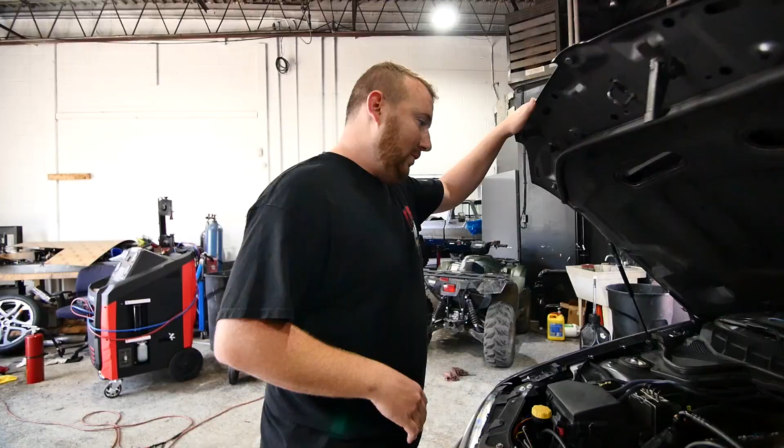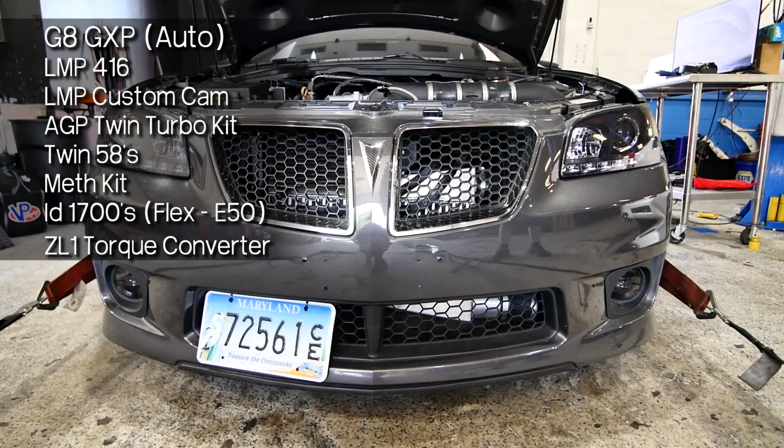What kit is this, AGP or something? I think so, yeah, AGP kit. We did not do this build, by the way. It came in not running, smoking like a freight train, so we did a leak down on it. Number 7 or 8 cylinder, I forget. The piston was torched. We put new pistons in it and put our cam in it, plus a couple odds and ends, you know, it's got meth on it. We buttoned up a couple things with the turbo kit that wasn't very clean before. It's still got a stock trans in it. I think this motor was like 10 years old before, had a lot of miles on it. I didn't tune it before though, someone else down south did it.

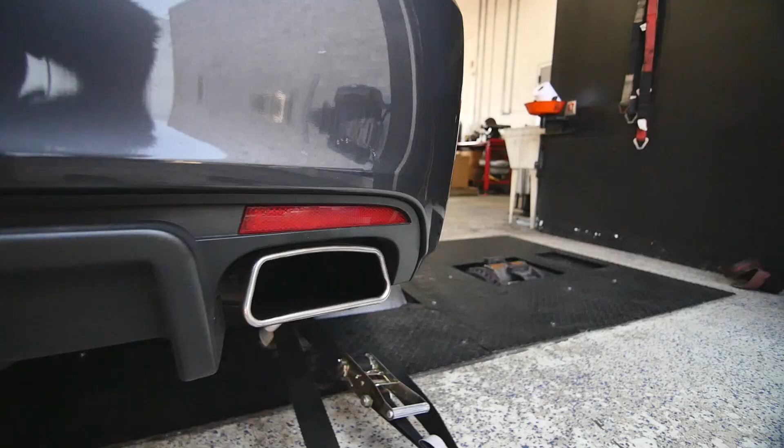So I heard a pretty bold claim about this, apparently it's the fastest GXP in the world. I think so, I don't know exactly. I mean, I know of a few fast G8s, but... That's a GXP? If it is, I feel very privileged. Yeah, you should. Sweat, you don't even need those things, no? Yeah, it's such a habit.

I'm like, what do you do?

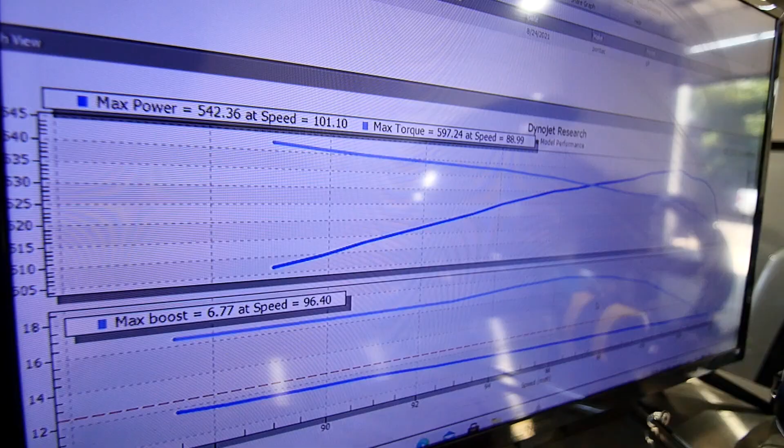So pump gas, not a full pull, 6.7 pounds, 13.5 degrees. Okay, so like nothing. Yeah.

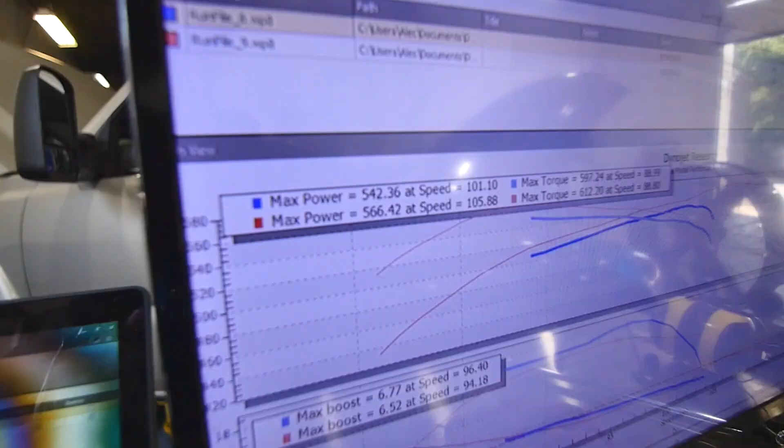What's his goal with this thing? I don't know, make it live I guess, because that's what came in blowing off. It's been 960 before, so probably a little faster than that. We didn't really change much, just fixed it and changed the cam. I mean, 960s with this is pretty fast considering he's got 100% stock drivetrain, stock trans, stock everything, it's a 6L80. So yeah, that's impressive in itself. I told him he's going to need to put a transmission in sooner than later.

Are we doing E on this thing at all, or just doing meth? Probably E50. Okay, yeah, cool. Yeah, it has a flex option. All right, cool.

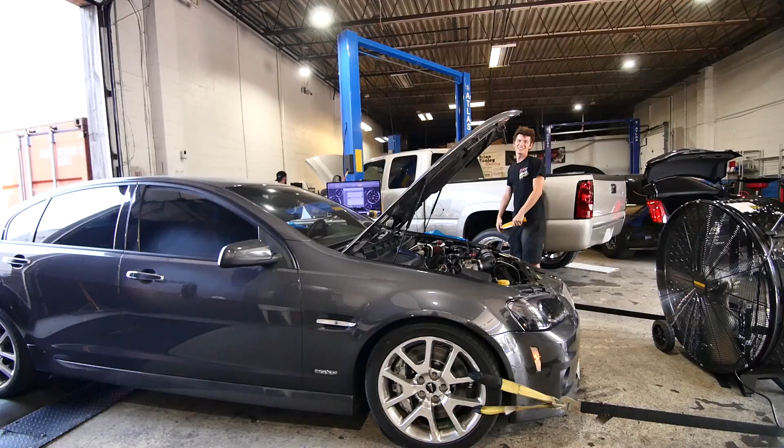Blow off down there? Yeah, I'm watching it and let off, it shoots the flashlight out. That's fun.

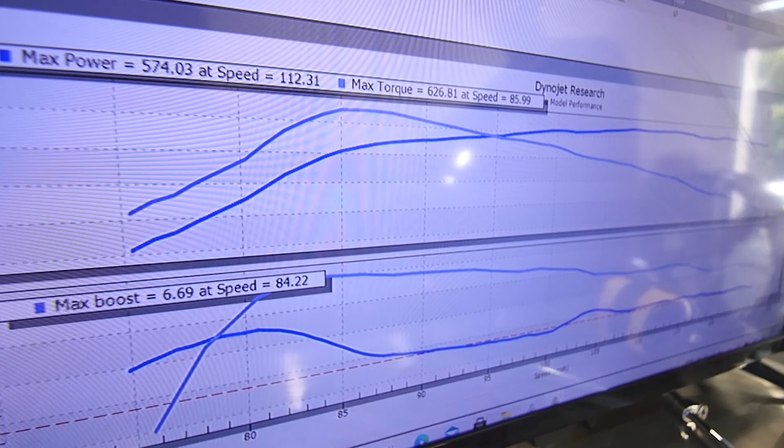That was less, I'll tell you right now. No, it wasn't, it was more. I don't know what the fuck I did, but I made more boost. It didn't smoke as much. You're adding more boost? Dude, the boost controller gauge is not working. I was just fucking with it and it made more. It's literally not reading anything. Yeah, it said that was 14 pounds, and that was not 14 pounds. Then it stopped smoking. Well, it says 6.7 on that. Yep.

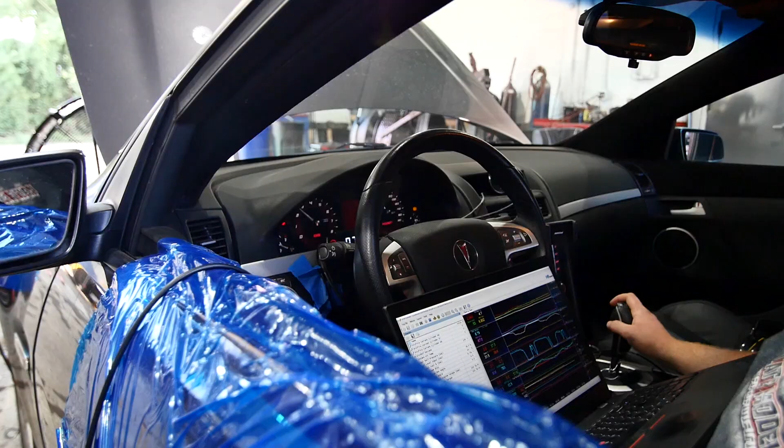It ain't working, the boost controller's not really working, not at all, I don't know what's going on. We're programming the duty cycle and it's not doing anything, it's just stuck on the gate right now, which is 6.5 pounds. I was just randomly messing with the scramble button earlier on this, and I was hitting up and it went to 9, but it can't go any more. If we do it properly, it doesn't want to work. I want to look more into it, see what's going on. It came in like that.

I mean, I wouldn't recommend this boost controller, but I do really like this car. This thing's nice, you put some money into it, it's got some nice suede, it's a nice car, it's clean, CTSV brakes. But it's tough when you don't do everything on the car.

We were talking off camera about customer supplied parts. A lot of times I turn it away, not because I can make money on the parts, because there's not a lot of money to be made in this industry on parts, but because I know if what we use works. If it comes back in messed up, then I know we'll take care of it, I will back our product up. Well, not our product, but the stuff we use.

We had a ZL1 come back in the other day. We run a certain brand of header on every car. He emailed me, said man, I think my header's hitting the frame or something. I'm like, ain't no way. Sure enough, he bought the headers from us, he brought it back, it was hitting the frame, just a mess up that the header company did. It didn't do it when it was cold, only when it got hot.

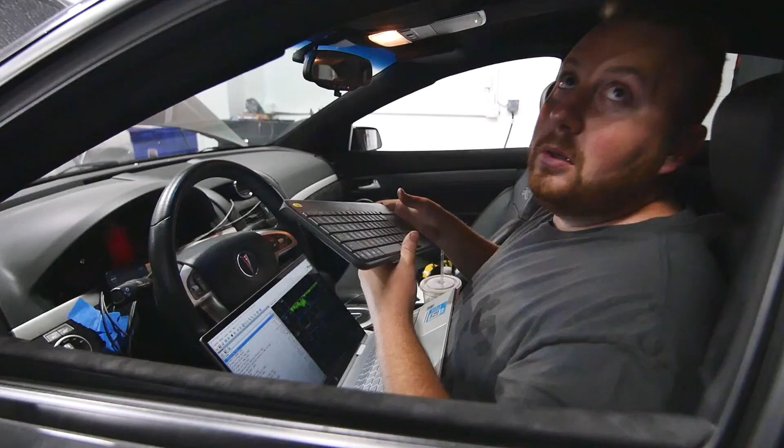All right, so we have the G8 on the hub dyno. The customer wanted it on here. This is like day 3 or 4 of this thing. We've had some problems with it, we'll put it on the dyno jet first because for builds that aren't cookie cutter, like custom stuff, we more than likely have problems, and it takes about 10 minutes to hook it up to a dyno jet versus 45 minutes to hook it up to this. We had a couple issues, bad O2 sensor, boost controller wasn't working, charge pipe came off, just stupid stuff going on.

Seems like everything's good. Did you do anything with the waste gates, change those out or anything? We didn't change the gates, we changed the springs in the gates.

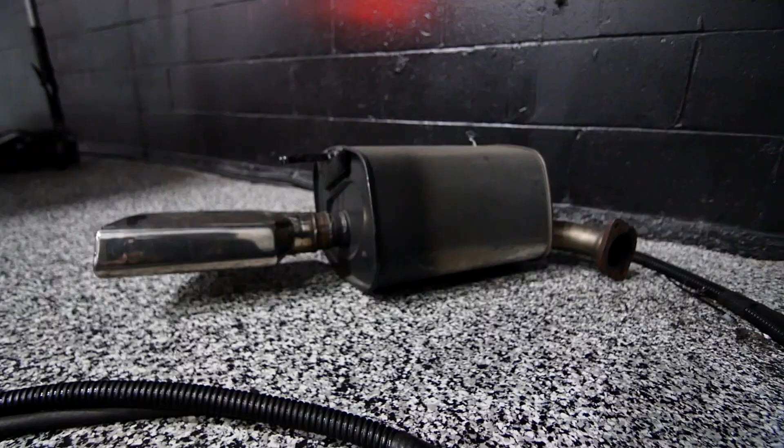Okay, put it back on that dyno. The only difference we did from that dyno to this dyno - now everything is pretty much tuned - but he has muffler deletes, high flow cats on it. It had stock mufflers before. We're gonna see if it picks up anything without mufflers. It probably will a lot, to be honest. We've had a couple situations with mufflers on blower cars and the turbo car we did - a turbo car made like 1500, took the mufflers off and it gained quite a bit, I want to say like 200 horsepower.

Jesus. Yeah, we'll see what it does. Okay, sounds good. And this is only twin 58s too. Okay, so it's small, baby turbos. They're only good for so much power too. I think they're like 10 years old. Sure, we'll see what it does. Cool.

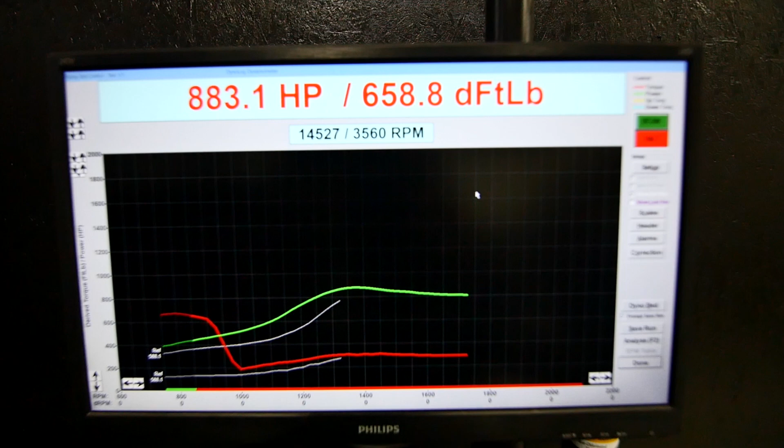Damn, that's pretty good, way better than it was before. Yeah, I picked up 100. We take the mufflers off, didn't change the tune at all. I swear my dynos don't like me, I don't know what's going on with this RPM signal. It's pissing me off, it's always something.

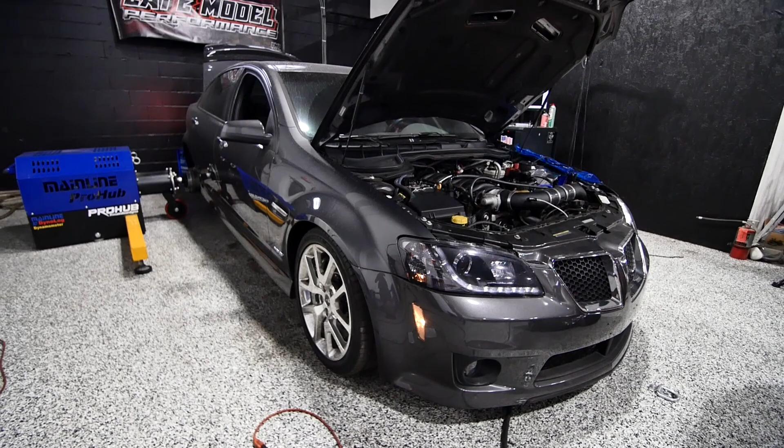You're good. Yeah, I'm kind of worried about the stock 6L80. It's true, it's going to be questionable for sure. I already told him he's definitely on borrowed time. Oh yeah, it's not a 6L90, it's a 6L80. And it already has quite a few runs on it.

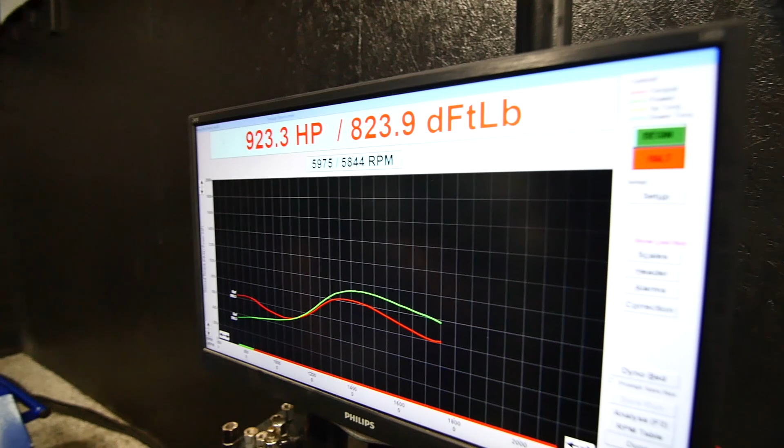For sure, well, I'm interested to see what he does at the track. Hopefully that thing holds together. Yeah, his goal is upper 140s, I think, mile per hour. So he should be able to do that easily. What did he do before? 144, almost 145, wow, in good weather, so that's a pick up.

And that was, I mean, 830 something before. So he wants his end goal to be 150. I don't know, I mean it'll be close - right day, right time, kind of a deal. Yeah, as long as the transmission holds. Yeah, we'll see. Okay, sweet.